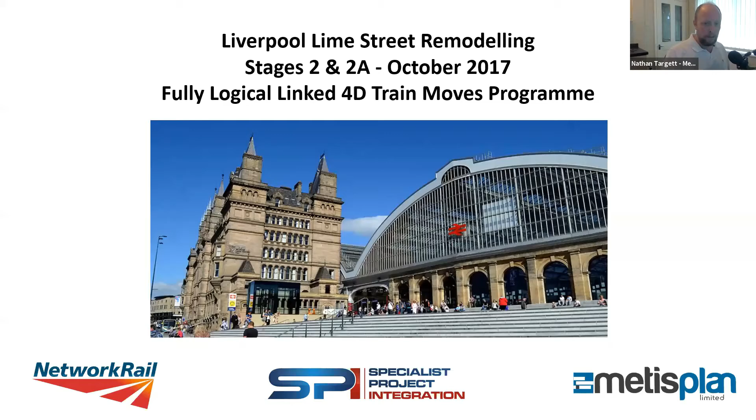We really must have upset a lot of people in Liverpool for a number of days, but at the end of the day, what they got as a result was a fantastic facility and trains there. This is the track - two lines in, two lines out.

It was hewn out of limestone, hand built by these guys, with donkeys and all kinds of pulley systems. Very narrow, and obviously trains back then were a bit narrow, not so big, and they didn't have overhead power - they had steam trains, so they didn't need all this other complicated equipment.

What this leaves us with is not the prettiest of places to work, and very dark at times. You can't get access because trains are running up and down, and there's not really any bolt holes to jump into if a train's coming past. You're cramped for two kilometers, then suddenly you're hitting all these points as you come into Liverpool and you're shoved off onto different platforms. So it's a difficult environment.

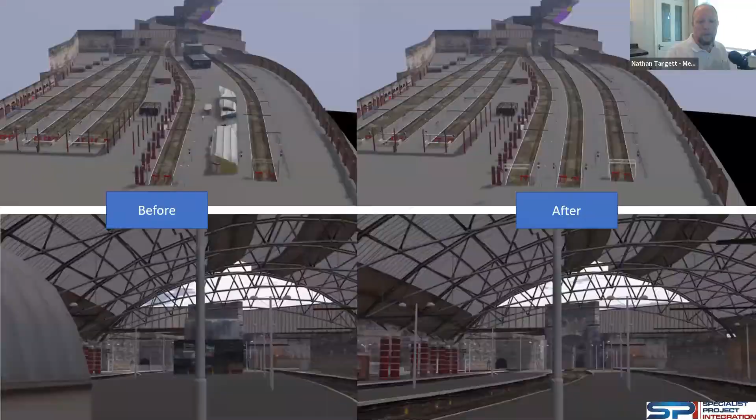For those who don't know where Liverpool is, I'll get my movie to show you. I know there's people from all around the world here - they might have heard of the Beatles or Cilla Black. But this is Liverpool, and they might know where that is, but they definitely don't know where Edge Hill is.

So I put a little video together to explain this cutting that was going through. It started at Edge Hill and jumps all the way through all that train track. You can see where the cutting has been built across - you've got car parks now being built across, shopping centres, roads, extra roads being built across. So it's now pretty much, rather than rail, like a crossover with underground metro work that we've done. You're kind of restricted.

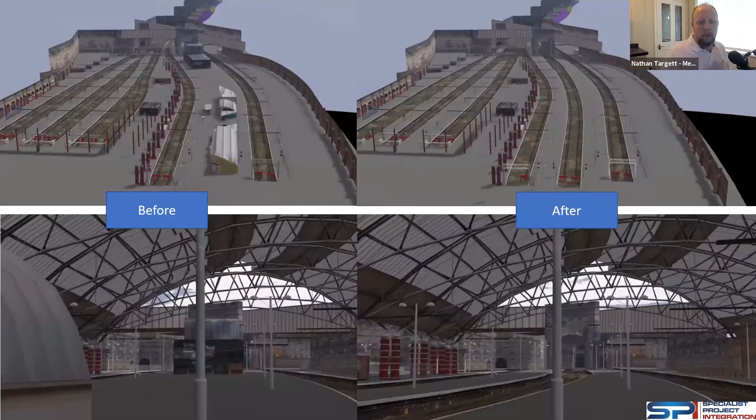So to do this, SPI designed a point cloud - they did a point cloud of the whole area because you couldn't get access. They made a VR model that the contractors could go through, and also made it available to the public to use. It was that model that they said, well, we've got this model and we've got all these plans.

Well, why don't we put them together and try and show some train movements? This was the final picture of what it would look like, and it does look like - it's very nice at the moment.

So what started very simply in November, December 2016 was that I was asked to try and show on our model, this VR model, some trains going through, hitting workspaces - which Synchro is very good at showing, where dynamic objects move through and hit a workspace, there's a clash. That seemed quite simple enough to do.

So I made a little video as a concept, and that was what you see - a work train coming through, hitting a workspace, a potential clash there. This train's passing that train. You're trying to identify things, and it should kind of be simple, right? And because I'm only using one little object, it was simple at this point.

And it suddenly changed, because then what happened was when we got to site, they said, well, that's nice, but we actually want to know the consistency of the train, the consist of the train - what it's made up of, how many wagons, how many cranes, how many locos are coming in, what the types are, where they're coming in, and where they're going to be crossing certain points.

And when I've seen videos done of train track replacements, you normally find the train is either installed, so it's in its final position, or it's on a plain line where the train just comes in and out on plain track. But this being the terminus, with lots of different points and crossings and splitting up of the trains and moving across, it became very, very complicated and quite difficult to manage - but it can be done.

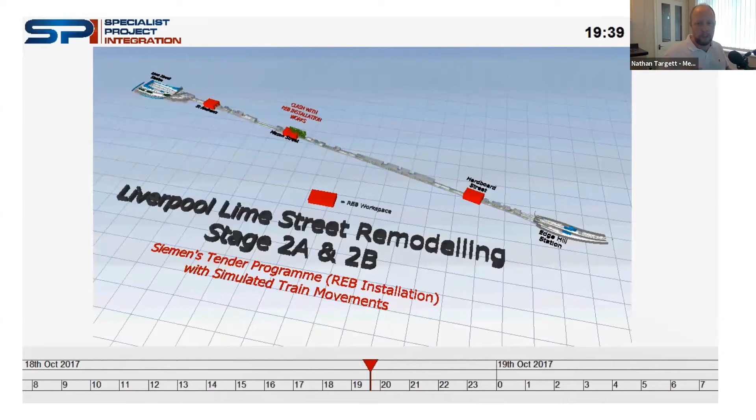I had to do a lot of calculations with macros about how to start the train, where to start, the percentage finish based on the consistency of each train. I can bore your senses, and I'm sure I did to Phil when I told him this, but a lot of maths went into the back of this, and it was quite hard, but we have a process we can use. The main contractors were the Buckingham's Group and an S&C Alliance, Siemens, and the Network Rail Station Management, who were in charge of the platforms.

The main program we work off is the S&C Alliance program, which covers the replacement of the track. These are trains that have booked their place into the possession a year or maybe two years in advance, because they've got to flow in amongst all the other traffic on the main line used by commuters and the public, and they've got to get into position. They have to come in at a certain time and leave at a certain time. So everybody wants to know where these trains are, how long they'll be in their area, and how to work around them.

What changed from just a simple model of a little train moving across, is they wanted to know the full length, the consistency of the train, where it was at any one moment, and the route and path it was taking. That is actually quite a hard thing to do.

The idea was better coordination between the different programs - the civils work, the signalling work, the train works - and to identify management opportunities and risks, and show where the clashes were. It would mean that if you knew where the trains were, you could bring in other works set for later stages, so you can de-risk future blockades or possessions, which is quite interesting. That's what we're looking for.

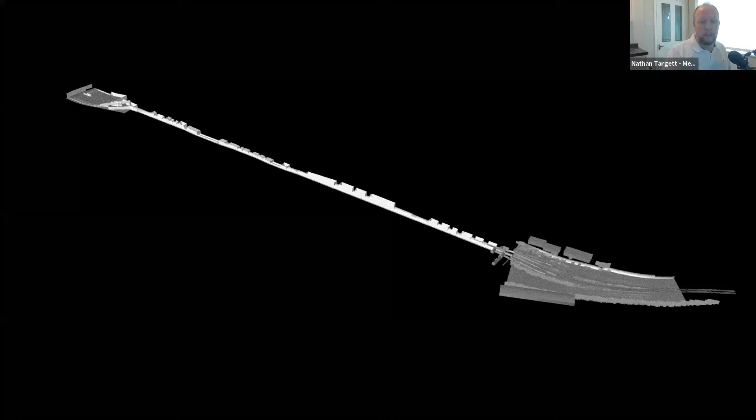So it's a 23-day blockade. This is the model, and I keep my models. Going back to that, that was what I got. I basically said, right, I know my trains have to fit that gauge. I'm only interested as a planner to see if my program or my client's programs are working, so I'm just going to use blocks. My loco is green and my wagons are red, but the length is very important.

I learned a lot about different types of wagons - I can bore you senseless on that, but they're normally named after birds of prey or some kind of fish, and there's variants of that. So you've got super salmons, and pre-1999 everything had maybe half a meter to two meter changes.

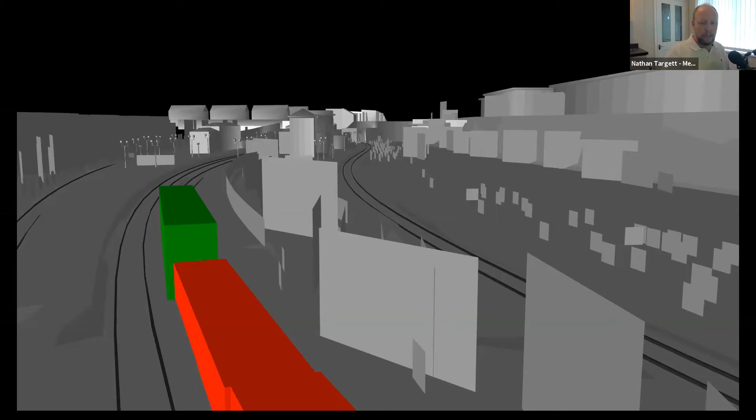Of course that affected the train, so each one had to be modeled. The S&C guys, the guys in charge of the trains and the track, they're brilliant - it's all in their minds, they've got it in their minds and in their program. But how do you get it out to the contractors to understand that? That's the hard point.

This is their program, done in MSP, Microsoft Project, and then brought into Synchro. This is Synchro, what you're looking at now.

What was interesting, you see this row here, number 19 - in their mind when they're planning, they've written it all out. This train comes in across these points. So Loco 47 is consisted of 9 salmons, which is a wagon, a Kirow crane, Kirow support, comes in on the up fast, crosses over on points 1, 2, 3, moves to this point 1, 2, 3, and then positions into platform 5. That is like 5 or 6 different moves. But when you write it out, as a human you can understand it, but as a computer you actually had to split it out, and that took me a long time.

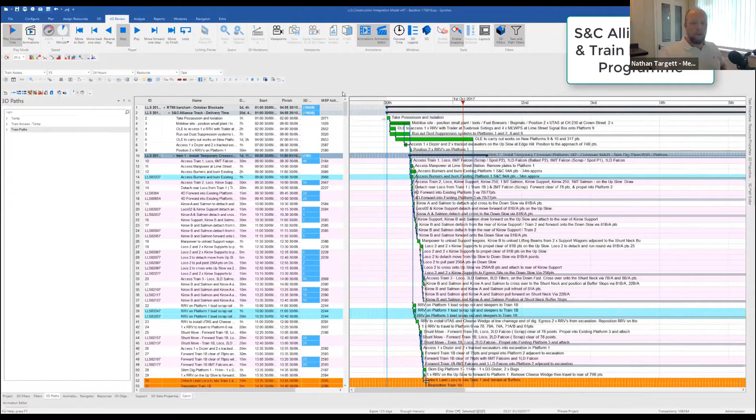To understand how that was, I actually filmed each one. I put a camera up and we were filming through it with their post-it notes and big wall planner, not obviously a schematic - I'll show you a video of that. From there I could get the modelers to make me my paths, and then I would assign the objects to it.

These early videos were also available to the other contractors. So if they went to the S&C program and saw activity code 21 with a 30 minute duration, they could see where that train was and where it was moving by watching that video. So even though the 4D wouldn't have been there originally, this was still getting it out of their head and onto a plan.

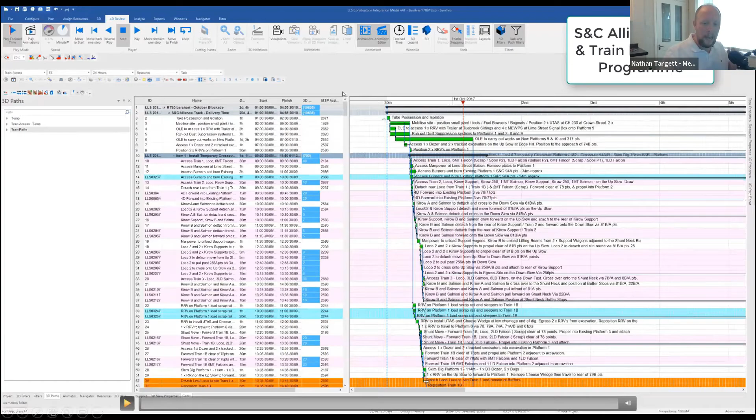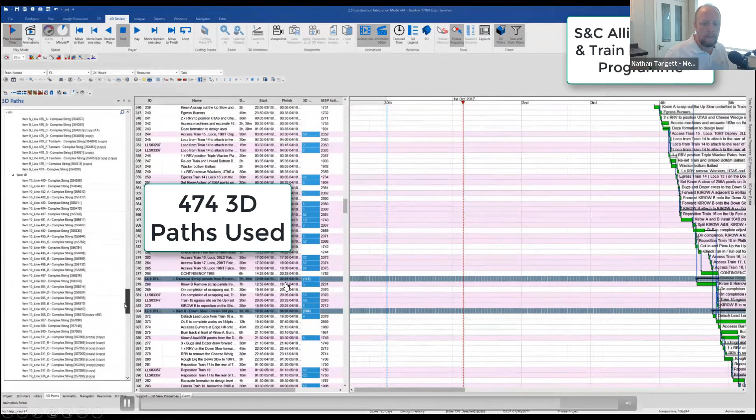So this is just showing you all the work that was done and all the objects that are attached. Anything with the blue is where an object has been attached to that activity, and these are all the paths that were used. So there's a lot of work done on that.

Excuse me, let me just scrub that through again. So that's how we were videoing it.

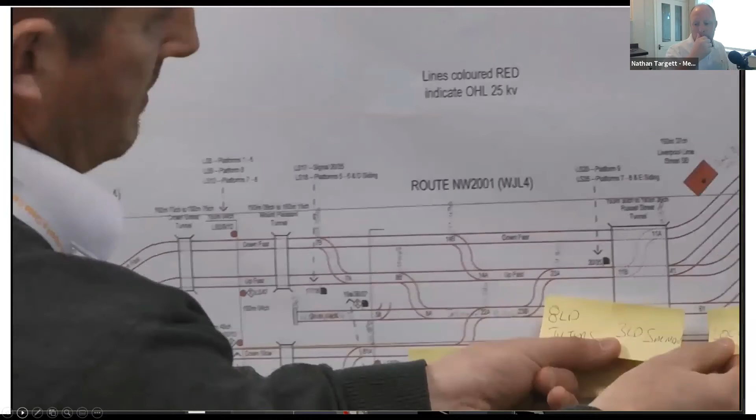So this would say Loco 3 loaded salmons, 8 loaded tilters, pulling forward into platform 3, I think that was. But what this doesn't show you is how long this is. Now that train could be 490 meters long. It's probably about 250, that one.

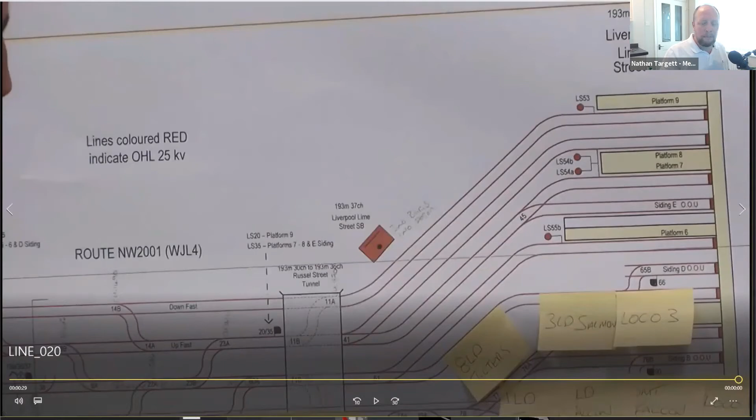But it would sit out over these points, you see, and of course that would block anything else moving up and trying to get into the platform, or any works over here. You might think it's not to scale, and that was some of the problems they were having. But by showing this at full scale, it actually makes a lot more sense when it's been modeled up.

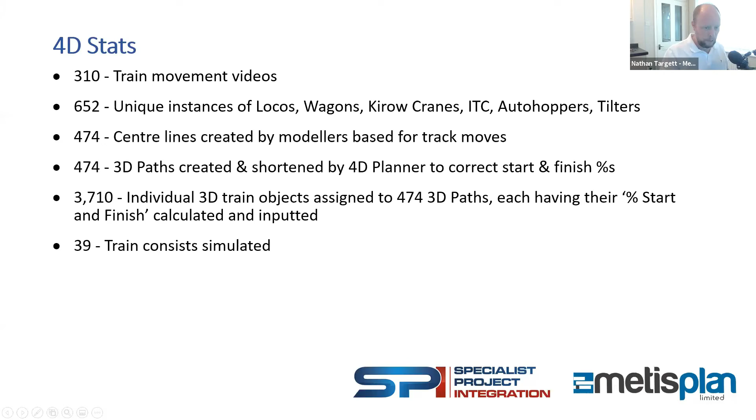So there's lots of train moves I made, lots of statistics about the paths, the number of objects I had to calculate the start and finish for - 3,710 to be exact, except if you got it wrong, then obviously it was a bit more than that. Longest path of the train, lots of things.

But the traditional method that they would be doing on site would be doing these PowerPoints. Now, I love PowerPoint, and there are times I use PowerPoint, and there's times I use 4D. If anything changes, you've got to rechange the PowerPoint. In some ways, you have to rechange the 4D as well, but it's not as bad if it's just a change of durations. If it's a change of consist, which did happen, then it's a little bit harder.

Normally those consist changes don't happen, but because a piece of equipment was coming in from, I think it was Holland or something like that, to replace the track, it didn't happen. So every other consist had to change. And by this time, I had gone 3/4 of the way through, and it was like, oh great, I've got to redo it all again.

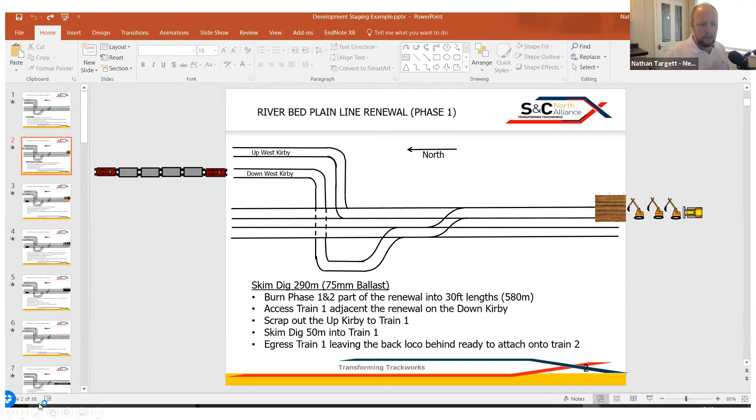But it took time. So what you end up with, though - this is a playback of just a period of week 1. And oops, I've gone back too far. And you've got the activities down here, what's happening at any one point and where the trains are on site.

So I know the green is a loco, the red is a salmon wagon, the white's osprey, the blues are - and you would have a legend up about this. I haven't put a legend on here.

And you can actually sit down with the guys and say, right, at 21:37, definitely at that time, that's how it's going to look on site, because those trains are planned to the minute and second if I can get it, which I couldn't, but it's not bad, you see.

Now, what was nice is this loco here - for the blockade manager, I think the blockade manager might be listening in on this - is that this train sat here from 10:30 till about 7:30 in the morning, and it's running. They don't turn it off. But while a train is running, or a loco is running, you can't actually do any work around it. There's a certain area of safety around that you can't be in.

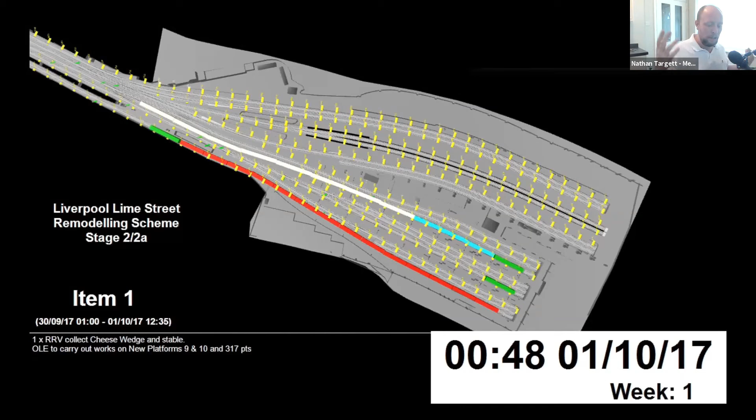But until you actually see it, it's in the mind of the guys, the S&C guys, who are not understanding how the contractors always get it in their minds. And you're going to see clashes. So that's what you kind of end up with.

And the process of going through this was that it helped me validate the S&C program. So there was a time when I knew there was only 2 Kirow cranes on site, which is the dark blue, and their Kirow crane support, which is just another wagon that sits behind it, right? I know they got 2, but for some reason, suddenly 3 appear, and I was able to take a screenshot, put a couple of stickers on and say, I think you've got a problem here, boys, because there's the yellow.

These are the 2 activities that seem to be start to start, and you've got an issue. You need to sort that out.

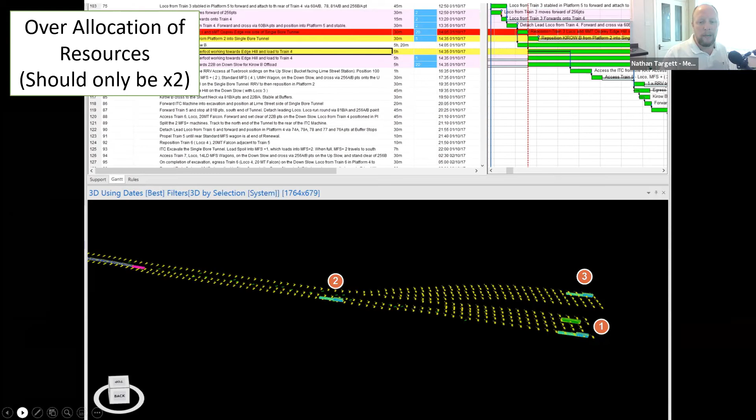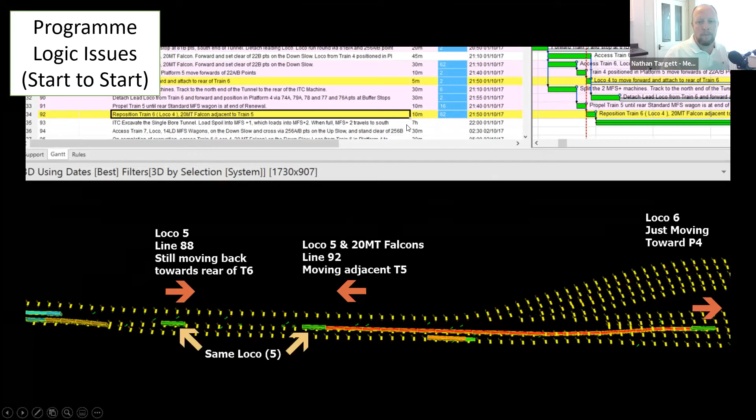Again, this was a loco trying to come in at the same time, or even the same loco sometimes. And you can say, well, you've got to start on there. So you're telling me you've got 10 minutes to do that move, but actually you haven't, because you've got to do this move in 5 minutes. And that really shouldn't be start with that one. You need to change your logic.

This one was interesting. They had some Kirow cranes up in a platform and they wanted to come back out, but they couldn't because this train was blocking. This really long train that doesn't fit in the platform was blocking the signals.

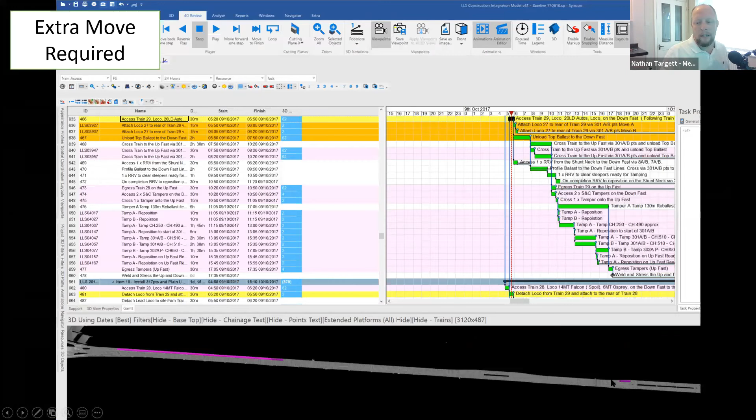So again, you say, right, if you want that train coming out, you've got to do something with this train or move it around. It validates their program, it validates the logic. You had a train here that was then suddenly over here. How's that? Well, you missed an activity here. There needs to be an activity added in.

And then once it's been built, you can use it for stakeholder meetings, contractor awareness, worksite briefings, health and safety, for example. That's really where you can use it, once it's been built.

Now, I have some learning. The problem is that the way I probably would have done it, looking back, to get earlier engagement, was to actually put the trains in their final resting position, like those 4D videos I had seen online. And what I actually did in King's Cross Station was put the trains in their final position. But this time, rather than trying to animate the trains through along the 3D path, I just made a sphere. And this sphere, like a ball bearing, was sent along the line for the duration that was supposed to go along the path. It took 30 minutes to go the 2 kilometers, or whatever the distance was. And in that time, if that ball hit any of the workspaces of the other contractors, then I had a clash report.

It wasn't perfect, but it gets you 80% there, and it's a lot quicker, especially if they make changes. So that's some advice I would give you if you're going to try this again. The change in sequence was a difficulty when trying to do the method I used, and that's why the ball bearing idea came into place with King's Cross Station.

The time - it took me a very long time to get it all together. One of the frustrations I found was that I was the planner and everybody was sitting around, needing me in the room.

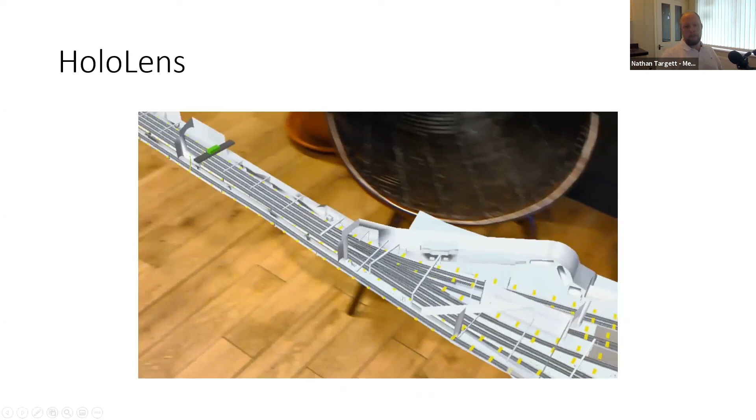Now, at the end of this project, I also looked at putting the same thing into the HoloLens, which Greg was showing at the end, and he's positioned it. The idea is that when we do a 4D presentation of a very long site like that, you're kind of restricted by your TV screen or monitor screen.

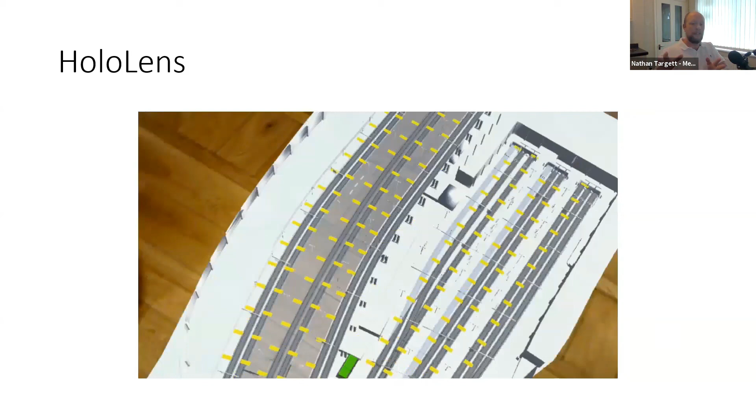So I can only show you what's happening between 9 o'clock and 12 o'clock down at the platform end. But also I'm asking people, oh, can you just pause there? I've now played you 9 till 12 o'clock of what's happening down the platform, but I need to show you what's happening down the middle or down the far end, and I have to do 3 different videos. Now you could put them side by side, but can you imagine this laid out on your board table?

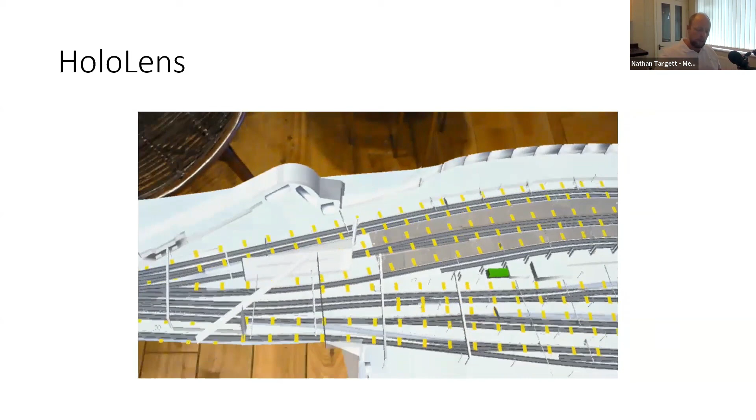Everybody's got their headsets on - it can be augmented reality if you can't do headsets, or you could use VR if you wanted to. But this would be there, and you can have all your planning meetings. You can see the train moving, you press go, you see all the models and all the clashes. This is really where I think Greg and myself are looking for anybody in infrastructure who wants to have a go at this, just to make planning a lot easier.

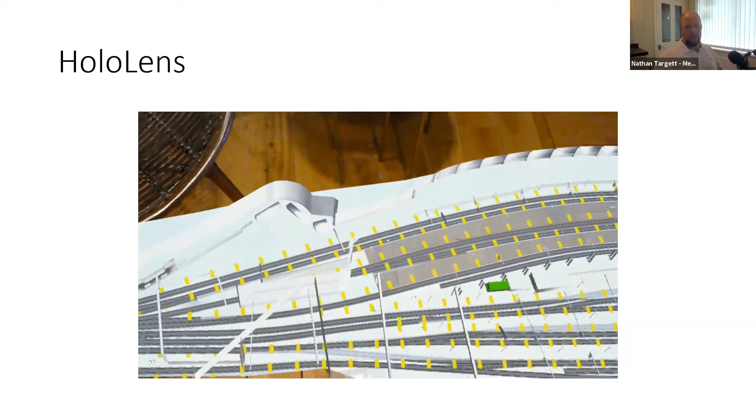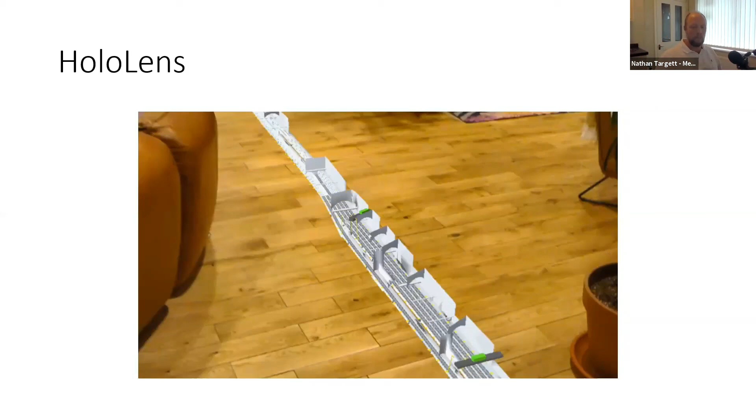And with the way HoloLens is, and what Greg's telling me at the moment, is that I could pick trains up and move them places. That completely blows your mind, and it just gives you a glimpse of the future. This could be a gas pipeline, this could be a road, in this sense it was a train. But I've worked on all these linear long projects, and they've got so many different work fronts along them. How do you keep up with it? HoloLens might be the way forward - so anybody out there, be interested.

Nathan, that's just fantastic. Congratulations on winning this award from Bentley Synchro, and also on documenting it in such a way that you can present it to us here.

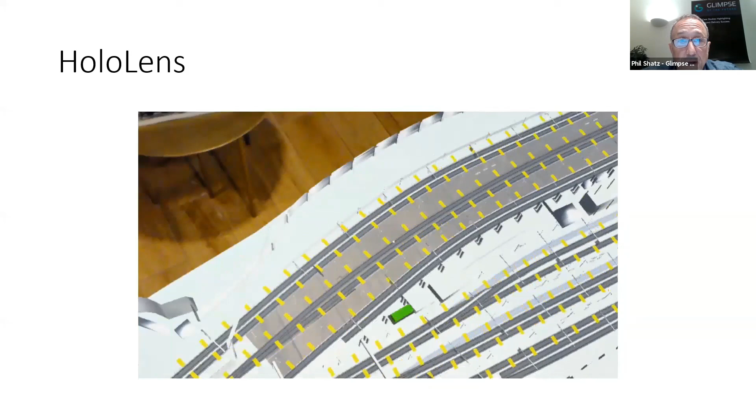I think it's wonderful that Metisplan are available to provide these works to other people.